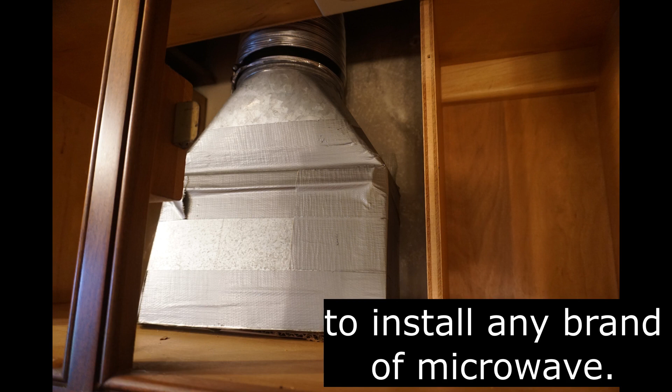Over-the-range microwaves can be set up to recirculate air or can be vented outside using ductwork. The original Panasonic, installed in 1990, was vented through the top of the cabinet. Flexible ductwork is not allowed. I'll fix this later. I'm installing a GE 1.6 cubic foot microwave.

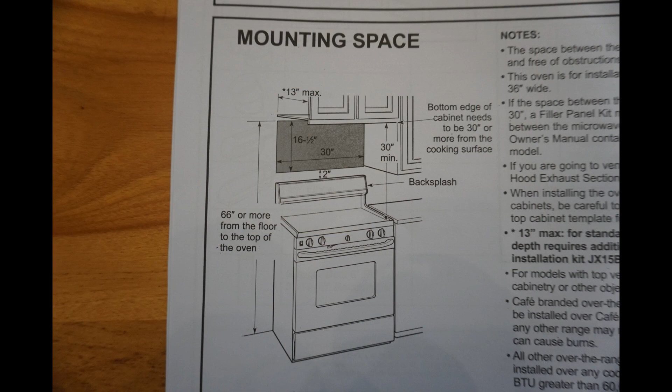Ensure that your mounting space is compliant to the manufacturer's specs. The bottom rear of the microwave hooks onto this bracket. A paper template is provided so that you can get the bracket positioned correctly. A hole needs to be drilled at position A on the bracket and at position B. The holes at position A and B do not need to go through a stud.

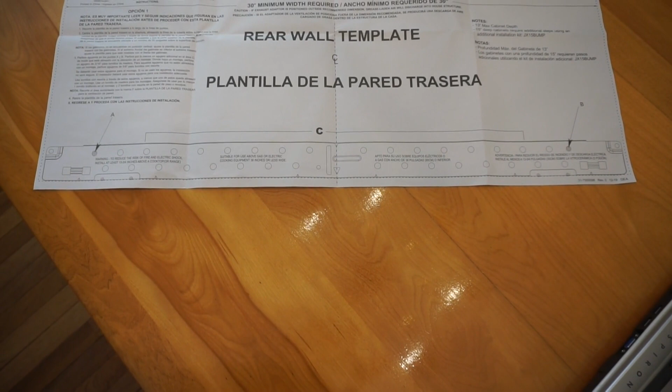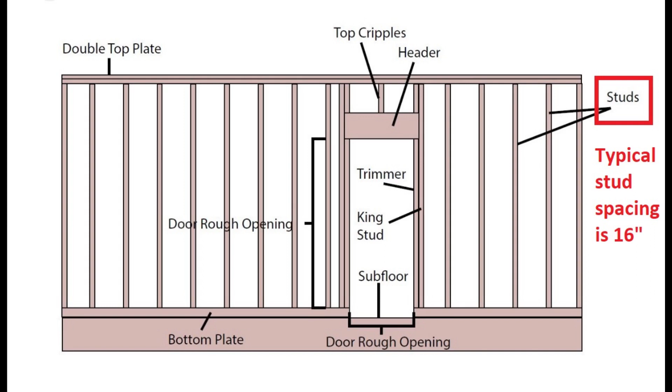One of the holes at position C, that would be between here and here on the bracket, has to be centered on a stud. The studs are the vertical frame behind the walls. To support the weight of the microwave, it needs to be attached to a stud. Typically, a stud is 1.5 inches wide. The typical spacing from the center of one stud to the center of an adjacent stud is 16 inches.

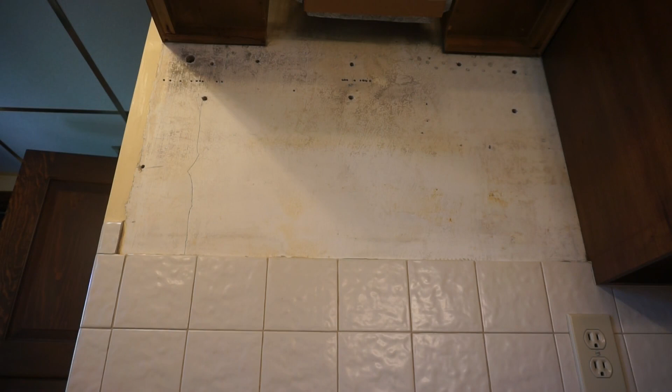You'll need to know where the studs are located on the wall behind the microwave. On the wall behind the microwave, this board is mounted. It supported the old microwave, and it is mounted to the studs. I transferred the measurement to the opposite side of the wall, and I can confirm that the previous installer marked this hole as the stud.

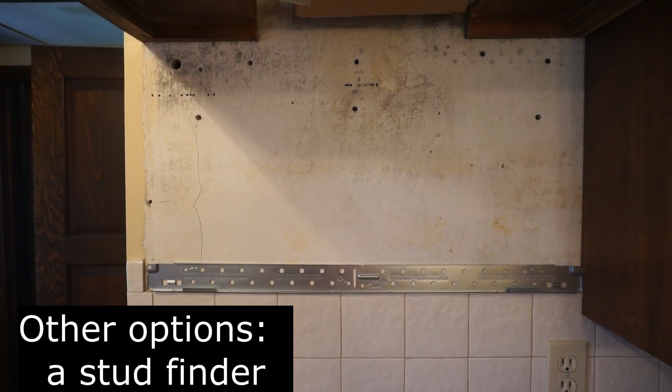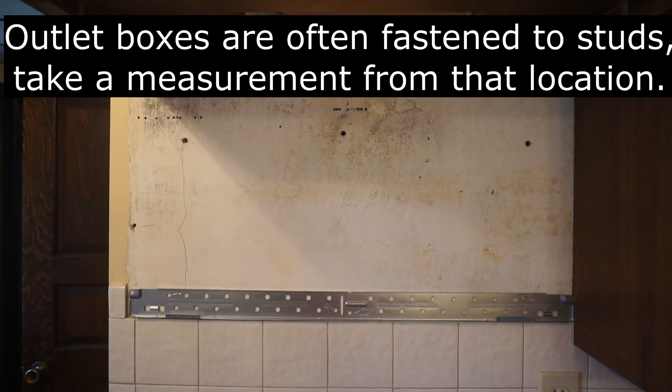Temporarily placing the bracket on the back wall, I can see that holes A and B won't line up with the stud, and that the stud that I marked does fall within the range of C on the bracket. Trim the template down by cutting along the dotted line on the perimeter of it.

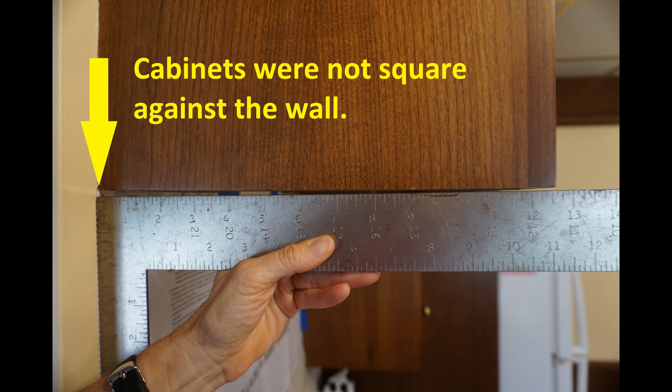I've temporarily tacked the template on the wall, and I want to determine the position from the edge of the wall and between the cabinet. I want to determine that spacing. You can see this bracket has a little bit of wiggle room, so you're going to be able to move this back and forth. To compensate for the forward lean of the cabinets, I lowered the template about 1/8 inch.

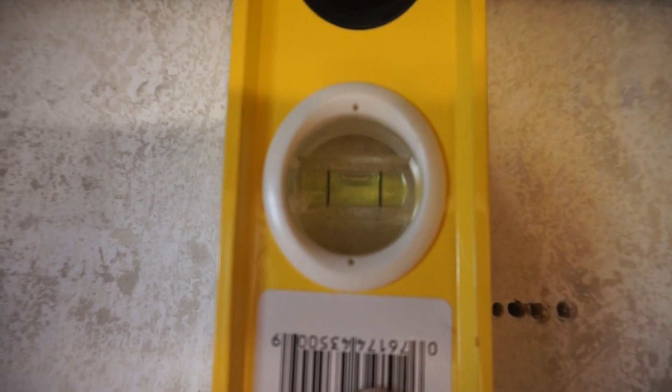Down the center of the template, there's a line, and it's marked CL, center line. When I have it positioned correctly, I'm going to mark the center line on the wall. I'll position the edge of my level at that mark, and then adjust the level so that both bubbles are in the center of the lines. A string and plumb bob can also be used to draw the plumb line.

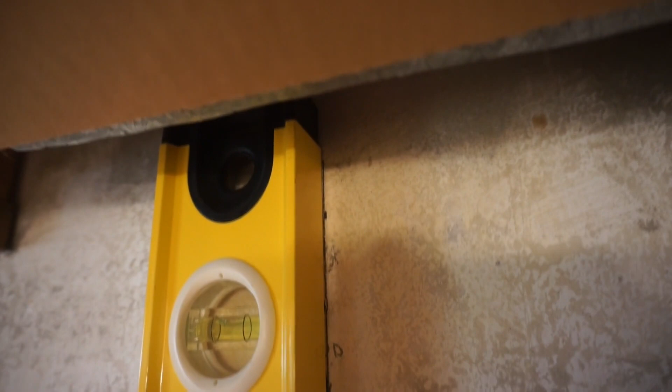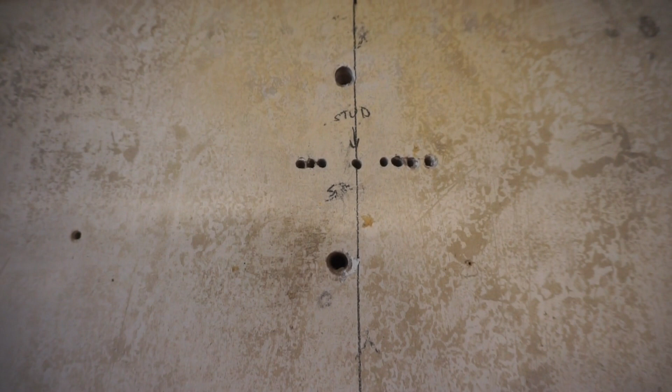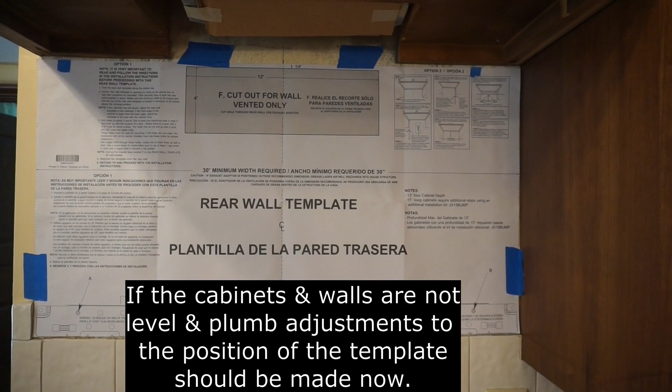And then I drew a pencil line along the edge of the level and extended it down onto the tile. My center line runs directly through the center line for the stud. For the final placement of the template, I've lined up the center line on the template with the plumb line that I drew, moved the template about 1/8 inch lower than the back of the cabinet to compensate for the forward lean of the cabinets.

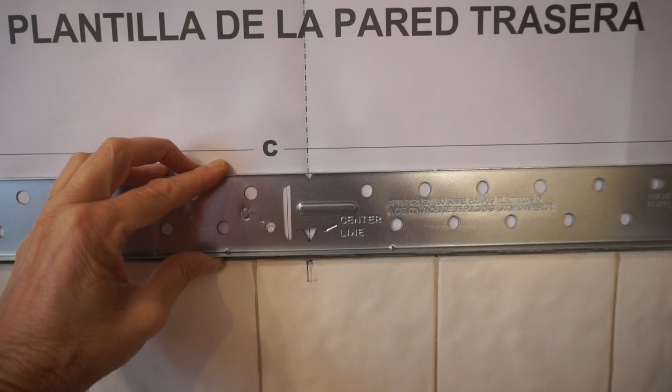As luck would have it, there's no hole in the C area to line up with my stud, which was at center line. I'll have to drill my own hole into the bracket at that location. I've noticed that the template is wrong. The hole for A is not positioned correctly. Neither is the one for B. So I'll mark the appropriate locations using the bracket as a template.

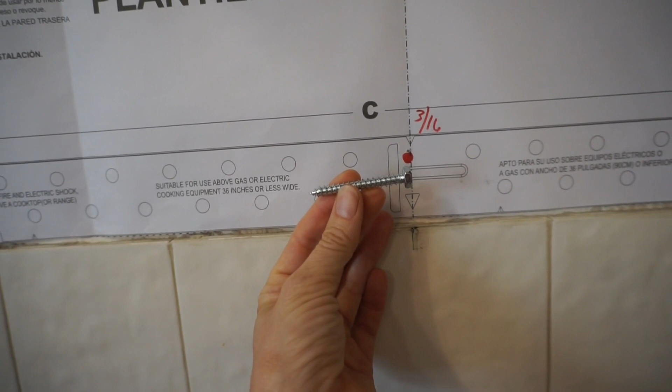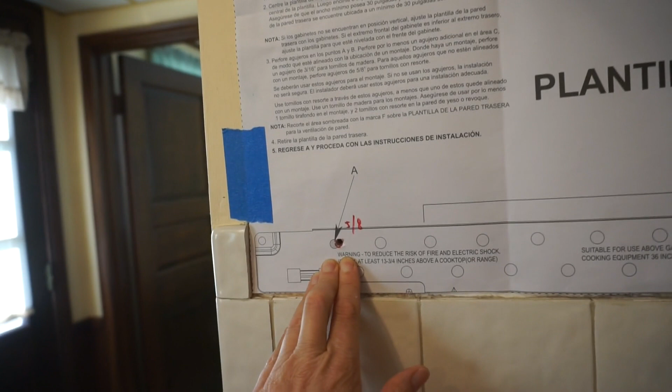If drilling into a stud, drill a 3/16 inch hole for the wood screw. If there's no stud, drill a 5/8 inch hole for a toggle bolt. I drilled 3/16 inch holes first, and as I thought might happen, I hit wood here, so I'll put a wood screw in here, hit the stud here, so wood screw here, and then this one went right through, so I'll drill it out to a bigger hole, 5/8 inch, so that the toggle bolt will fit in there.

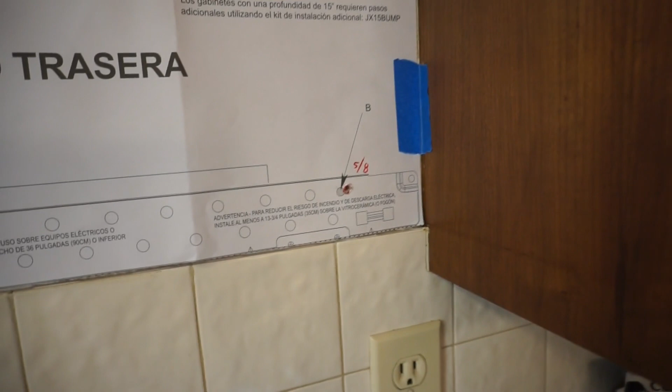Whenever a hole is drilled into a wall, there is a risk that you could drill into a power cable. This outlet is close to the area of where I was drilling my holes. Before drilling, I removed the cover and could see that the cable is fed into the bottom of the box.

Residential drywall is typically 1/2 inch thick. My house is rock lath with plaster, about 7/8 inch thick. Mark the depth of the wall on your drill bit with painter's tape. Drill to the appropriate depth, then poke something into the hole to check for power cables.

The bottoms of my cabinets are recessed. If your cabinets are recessed, then you'll have to put a block on the underside at those fastening points. The blocks will prevent the fasteners that go through the top of the cabinets and into the top of the microwave from bowing and bending the metal. I'll use the blocks from my previous microwave install.

The upper cabinet template gets installed with this edge against the back wall, and if it's roof vented, you'll have to cut out a hole. Mine's already done from the previous install. I fastened the upper cabinet template in place, and I've aligned the center lines of both templates. I'll drill a 3/8 inch hole at J and at K. If the holes in the cabinets from the previous oven overlap and are large, just use some washers.

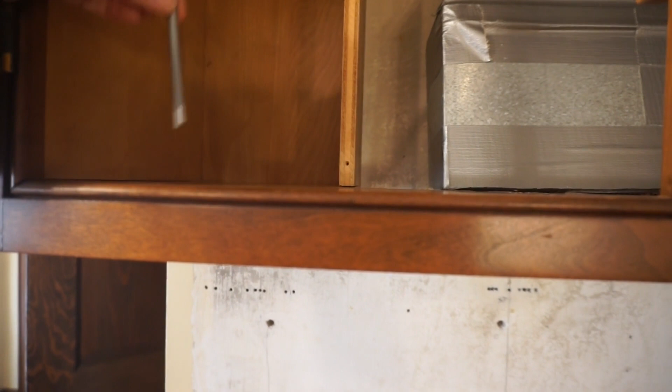After you have the holes drilled on the bottom of your cabinet and you have the bracket mounted on the wall, what's going to happen is you're going to lift the microwave and you're going to hook it onto those hooks, and that's going to hold the microwave in place while you swing it up. Once the microwave's pushed up into place, you'll need to drop these 2 bolts down through the holes. Hopefully they line up and secure the top of the microwave to the bottom of the cabinet.